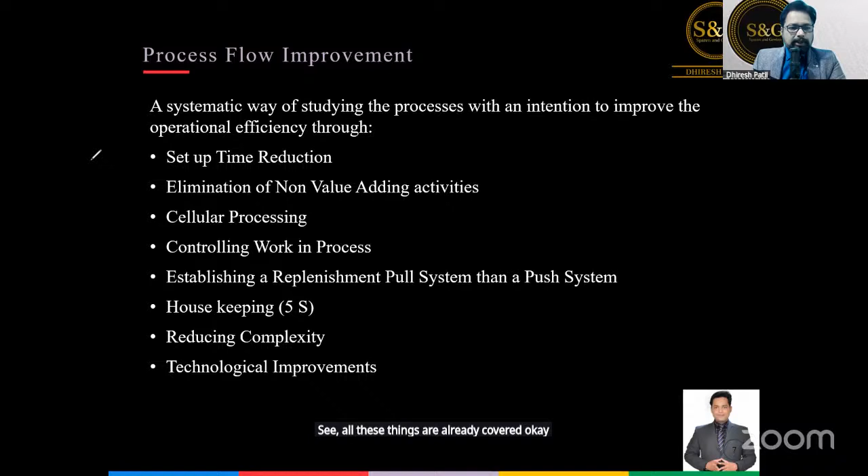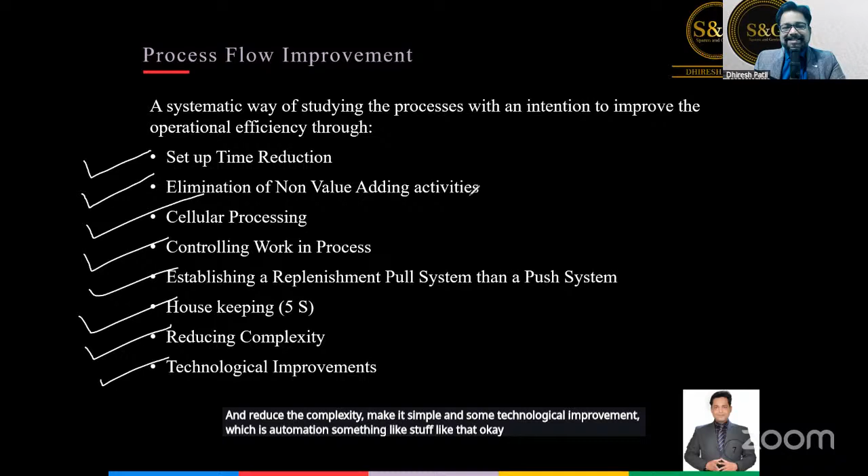So setup time reduction is called the SMED technique, elimination of non-value added, cellular processing, controlling the WIP. So this is the Little's law, which we are going to discuss. Pull system, push system, the housekeeping, which is 5S, and reduce the complexity, make it simple, and some technological improvement, which is automation, stuff like that. So these are certain tools we use from the lean point of view. So let's cover some of them right now.

So the first one let's cover is setup time reduction. Now, what is setup time? First of all, let's try to understand. Setup time originated from Toyota. The biggest challenge to all the automotive sector is changing the dies. Let me just give you a simple analogy for the non-technical people. Let's say this is your car. Imagine this is your car.

So now let's say this is the car, and we have the front door and the back door. I've just drawn a very old-fashioned car so that you can correlate with this. So we have this portion made up with a different shape, this portion with a different shape, and so on. Bonnet and the top of this. So all these different body parts of the automobile basically use a die. What is that? The equipment is a die.

What is a die? It's very simple. Let's say this is the plate. And I want to make this kind of a shape, the top of the roof shape. So a die will be there like this. I'm just giving a very basic idea. And this is a simple metal plate, which you want to convert. Now, what will happen is there would be a mold, exactly. Mold or the die, exactly.

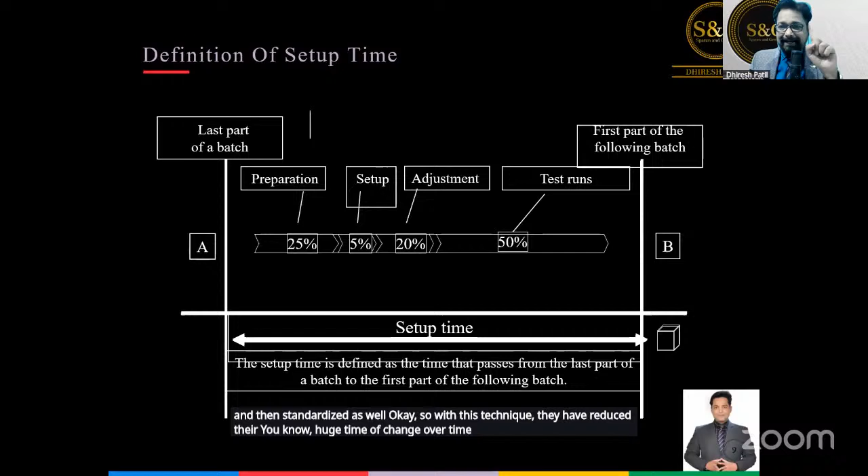So with this technique, they have reduced their huge changeover time into a single digit minute. That's why it's called Single Minute Exchange of Die, SMED. Super. Chalo. So this is all explained in your curriculum. You can go there and check that out.

Now then, elimination of non-value added, NVA. See, there are basically three types of activities. One is called value added. Second is called business value added. Third is called non-value added. Value added meaning, for example, for the bank account opening process, account opening is a value added process. Clear?

Now business value added is a maker checker concept. For example, a check has to be processed. The first accountant will make the check, process the check. There will be a senior person who will validate whether all the details are filled properly or not. So it's called the maker checker concept. This is not important for the customer, but it is important from the business point of view. That's why it's called business value added.

And non-value added, we all know TIMWOOD, right? Transportation, inventory, motion, all the 7 types of waste are called non-value added. The downtime, correct? So all these are non-value added aspects. So in your company, give me an example. Or let me ask you one question.

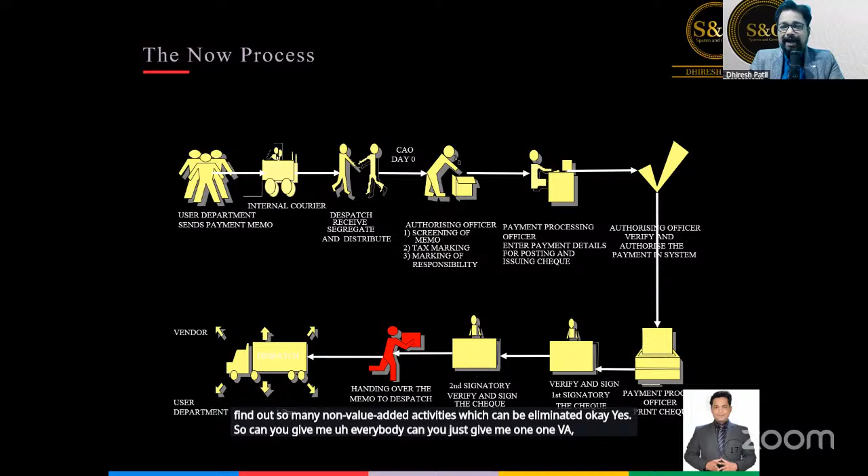Okay. Yes. So can you, everybody, just give me one VA, BVA and NVA activity in your company? Chalo, give one example, type in the chat box so that we can understand. I will read out so that we can learn from each other. One VA activity, value added activity you're doing. Just write it very short.

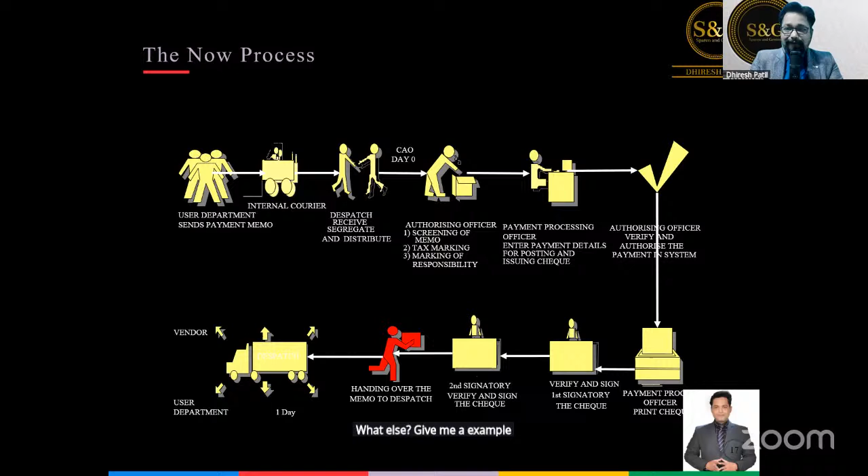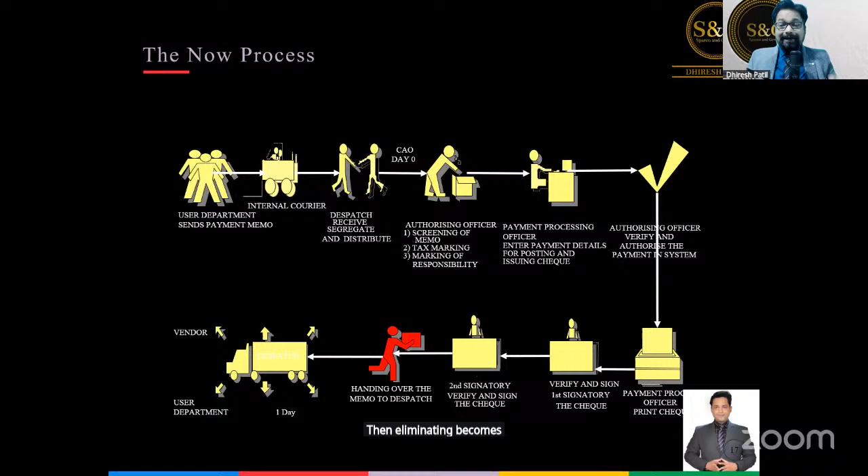Okay, so that you will get that lens, and you can identify the activities which are falling in these three categories. Once this lens is developed, then eliminating becomes very easy, but identification is very difficult. Understand this. Eliminating non-value added is easier than identifying non-value added. And this is a very important stuff.

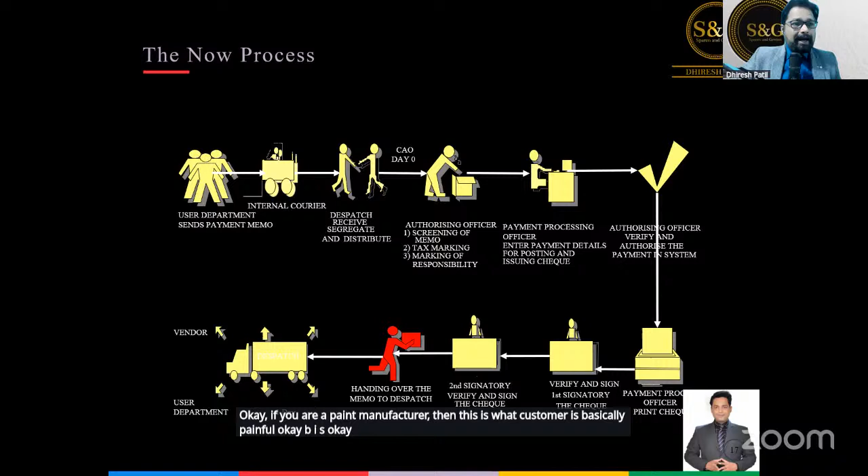Okay. Providing good quality finishing paint is value added. Fantastic. That's what the customer is paying for, right? A good quality finishing paint. If you are a paint manufacturer, then this is what the customer is paying for. Okay. BIS. Value added is BIS. Introduction to LIMS is value added. Okay. So according to your industry, those will be value added.

Internal audits are business value added. Yes. Very good. Value added is machining. Business value added is loading, unloading job. Very good. Non-value added is transportation from one machine to another. Very nice. Super.

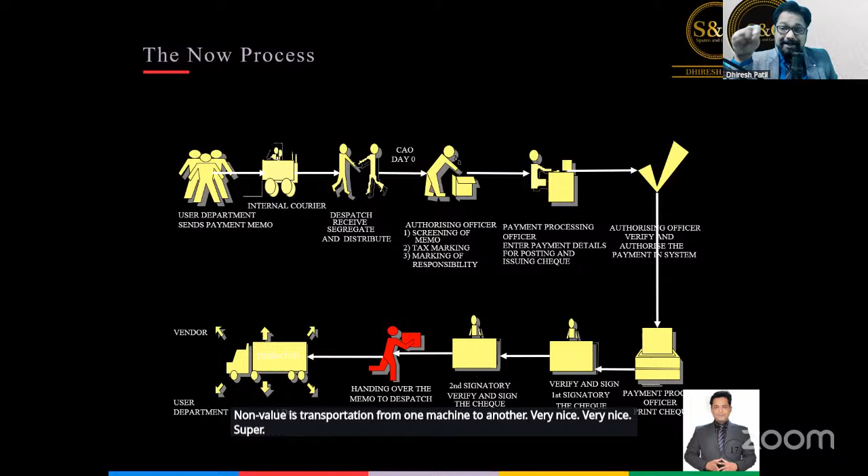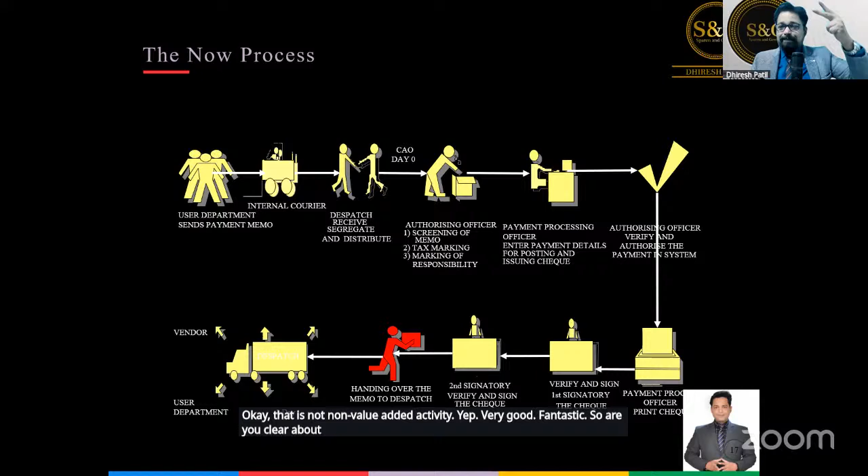Now, if you go deeper, if the distance between the two machines is excessively high, this is unnecessary transportation time, and that is a non-value added activity. Clear? Very good, fantastic. So, are you clear about VA, NVA, BVA? Just give me yes in the chat box. Do this exercise, you can eliminate a lot of unwanted stuff. Okay, just give me yes.

Super. All right. Now let's talk about a very important concept about inventory. There is a law called Little's law. Professor Little was a professor from MIT, Massachusetts Institute of Technology, US. So according to him, the overall lead time... see, whenever we talk about lean tools, we talk about the time element: changeover time, cycle time, lead time. The time element comes into picture, the inventory element comes into picture.

So, according to him, the lead time is directly proportionate to WIP and inversely proportionate to average completion rate. I'll give you a very simple analogy example so you can understand this concept. Little's law. Now, imagine you are going to an ATM to withdraw some cash. This is the ATM, automated teller machine. There are already 5 people standing in the queue.

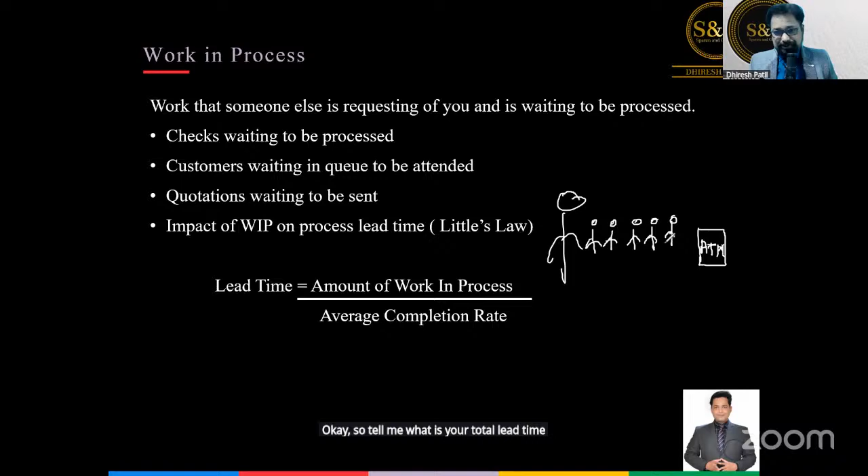And you are the 6th person. I've just drawn you a little bigger. Now, the ATM machine takes 5 minutes to dispense the cash for every person. So tell me, what is your current total lead time of this entire process? Think about it. There are 5 people in the queue right now, and everybody takes 5 minutes.

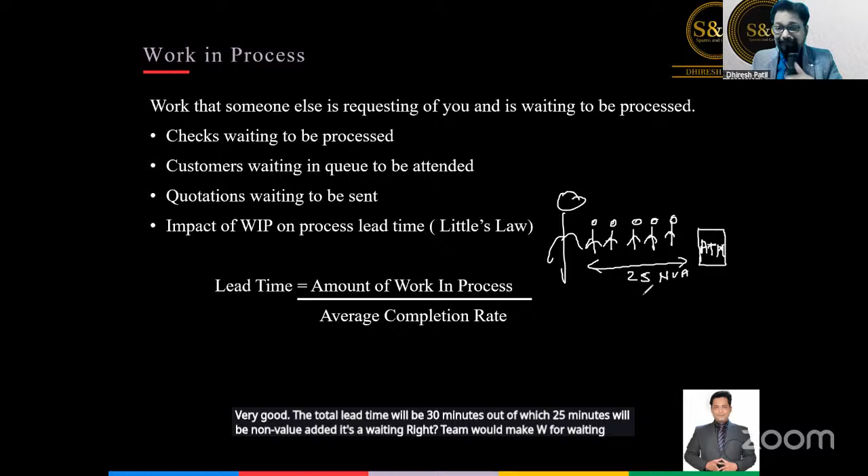Very good. The total lead time will be 30 minutes, out of which 25 minutes will be non-value added. It's waiting, right? W for waiting. So you wait for 25 minutes and 5 minutes will be value added for you. Yes or no? Everybody with me? Just type yes in the chat box. So imagine this is your WIP, work in progress. 25 minutes of waiting time, non-value added, adds no value to you.

Correct? Now let's work on the first point, which is amount of WIP. Let's reduce the WIP. According to Little's law, the lead time in this case is 30 minutes. Now, instead of 5 people in the queue, there are only 2 people. So let me reduce the WIP from 5 to 2. Now tell me what will be the lead time for you. Type in the chat box.

Exactly. It will be 15 minutes, because 10 minutes non-value added, which is waiting, and 5 minutes for your own processing. So just by reducing WIP, we have reduced the lead time from 30 minutes to 15 minutes. Are you clear? Up to here, everybody with me? Just type yes in the chat box.

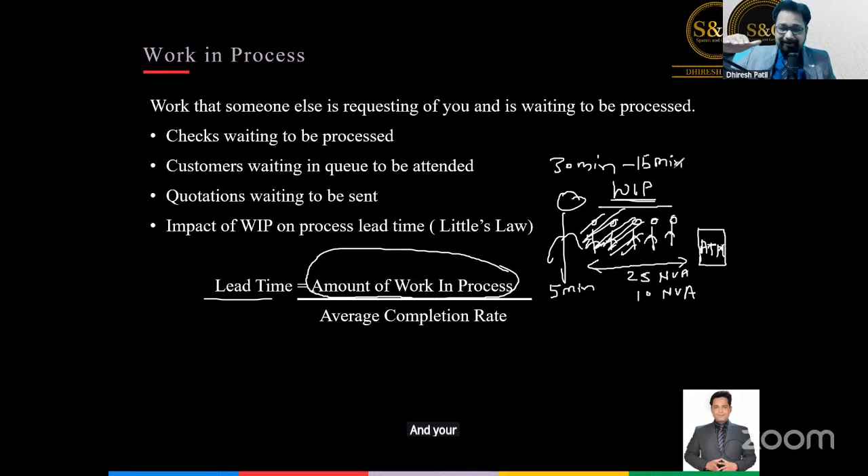Everybody understood? So WIP earlier was 5. Now we have reduced to 2 so that we are reducing it faster. Correct? So it's like this. If you are going for, let's say, loan processing in a bank, and that person already has 10 files, and your file is the 11th one, you have to wait for those 10 files for your file's turn to come. So that is a waiting time.

Now imagine instead of 10 files, he has only 2 or 3 files. So according to WIP, your waiting time will reduce and your lead time will reduce. Now coming back to the denominator part, which is average completion rate. Instead of 5 minutes dispensing, if we increase the speed of the machine, what will happen then? Let's say instead of 5 minutes, the machine starts dispensing in 2 minutes. That's what the completion rate is.

Now in this case, what will happen to the lead time? If you have 2 people in the queue and you require only 2 minutes to dispense the cash, how much will be the lead time? Type in the chat box. Exactly. So now you require only 6 minutes to dispense the cash, out of which 4 minutes will be waiting time, which is non-value added, and 2 minutes for the dispensing.

So from 30 minutes to 6 minutes, we worked only on 2 elements. One is the WIP, and the other is the completion rate. We have made the completion rate faster so that the lead time can be reduced from 30 minutes to 6 minutes. Are you clear? So you also can think about how I can reduce my WIP and how I can work on a faster completion rate. Clear, everybody? This is called Little's Law. Just type yes in the chat box if you have understood this basic fundamental principle.

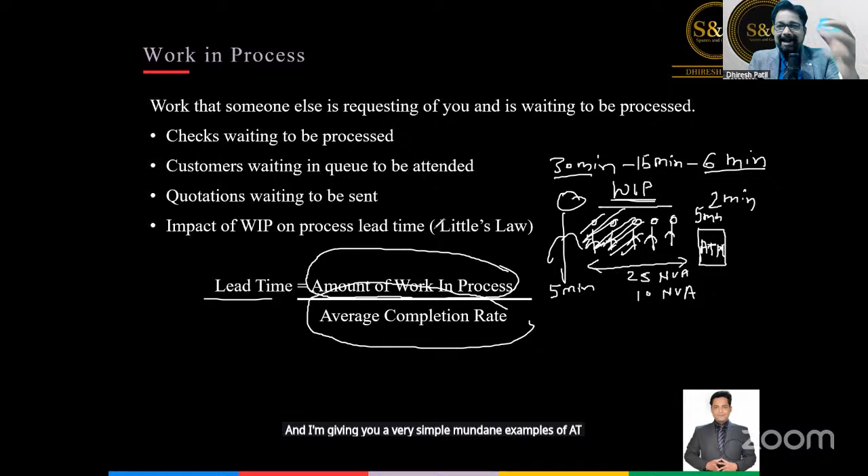Very powerful laws, guys. These are very simple. See, SMED, VA, NVA, TIMWOOD, these are very, very simple, but equally powerful laws. And I'm giving you very simple mundane examples of ATM machines and the juicer, mixer, etc., so that you can correlate with this very easily. All right. Super. Thank you very much.

Now, how many of you are aware of 5S? 5S kisko pata hai? So all this is explained in a sequencing manner. Yeah, workflow layout. Before 5S, there is a small topic of workflow layout also included in your curriculum. I'll come to 5S. Just let me touch upon this topic as well quickly. Workflow layout also plays a very important role, whether it is a bank, a BPO, or a manufacturing company. How the work is flowing on the shop floor, on the Gemba basically, where the action is happening, which makes a lot of sense.

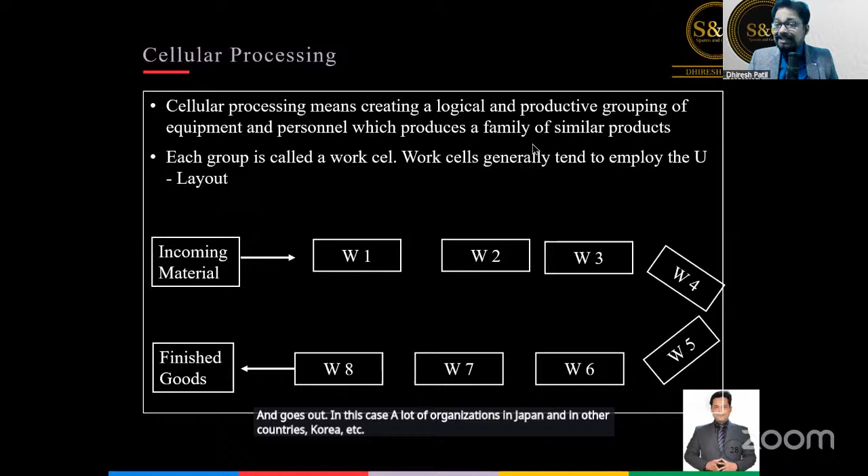One way of doing this is cellular processing, or a U-shaped layout, where the process starts here and goes in a U shape and comes out. A lot of organizations in Japan and other countries like Korea have used this cellular layout successfully, where only one or two people can manage multiple operations because of this setup. It's designed so that waiting time is minimum, and motion waste and transportation waste are minimum. This is called cellular processing.

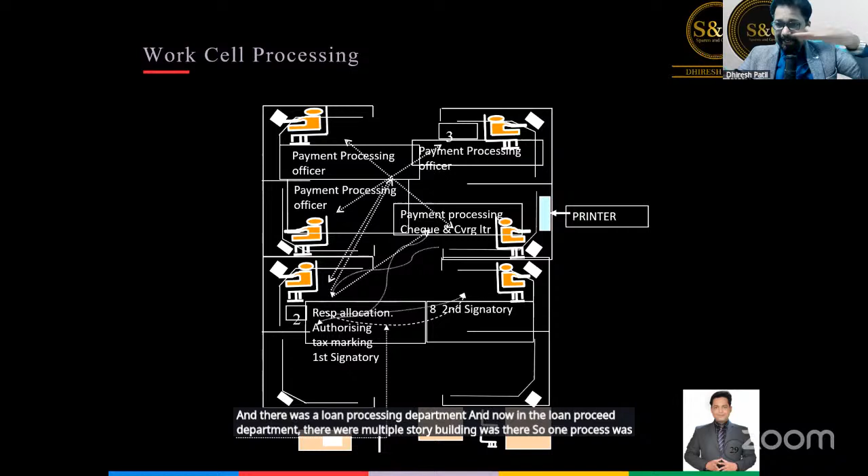One bank example I'd like to give for this work cell processing: this is a live example, we were consulting that bank, and it had backend processes, including a loan processing department. In that department, there was a multi-story building, so one process was happening on the second floor, another on the third floor, and another on the seventh floor.

So what we did was ask all those process team members to sit in one physical location. Now, I'm talking about 10 years ago, and technology has improved a lot since then, but see the fundamental point, guys.

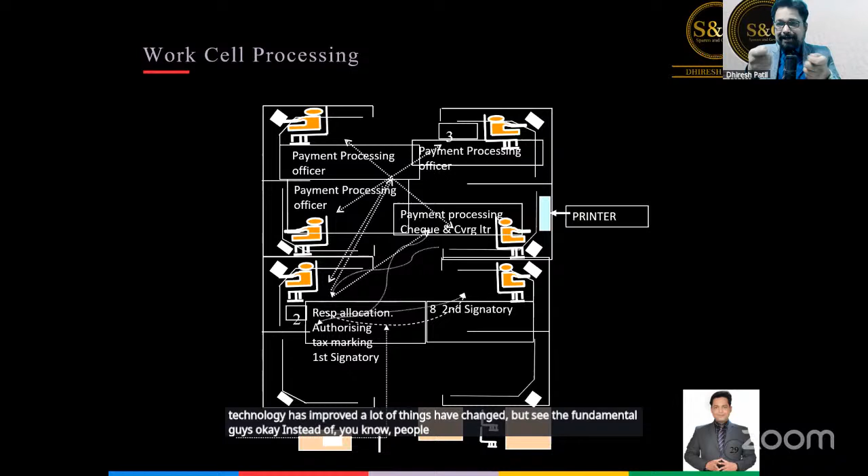Instead of people carrying physical application forms to multiple floors and waiting at each location, now all three people sit together using this cellular layout and process the loan faster. Earlier they used to take 7 days to respond to the client, and now they're doing it within 24 hours. Whether your loan will be passed or your file will be rejected, or what deviation is in the file, that can be displayed within 24 hours. This is a huge achievement with this simple but very powerful technique of cellular processing design.

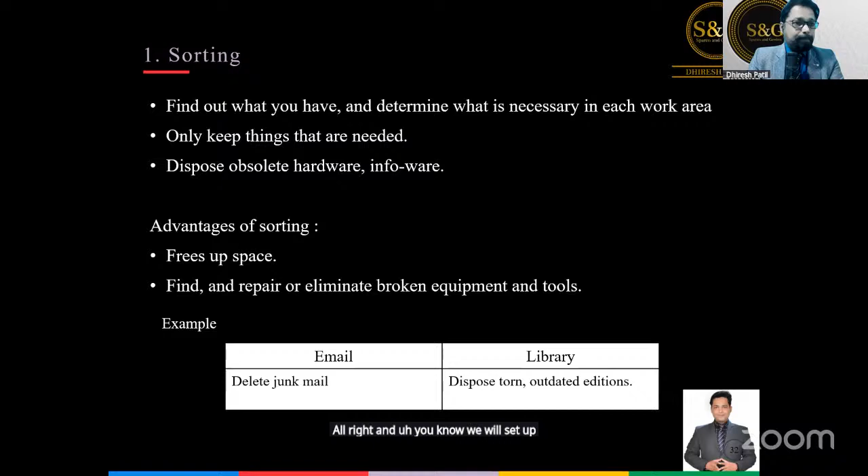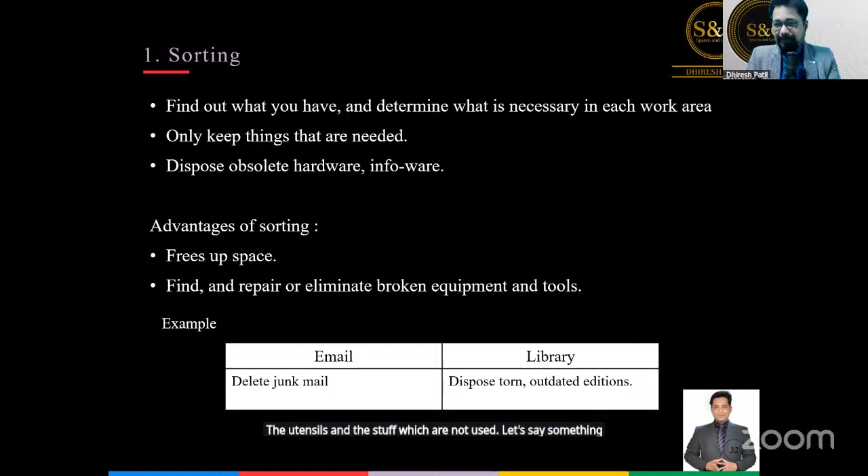So the first is sorting. Everybody knows this - sorting is what is required, what is not required. I always say our home kitchen is a fantastic example of natural 5S. Housewives or people working in the kitchen aren't aware this is a technique called 5S, but we are naturally doing this. Whatever is wanted is kept very close to the gas or where the work is happening. Utensils used rarely, like once a week, are kept a little aside. Bigger utensils used for festivals or occasions are kept farther from the gas. So we are actually doing 5S unknowingly. Sorting is nothing but sorting wanted and unwanted separately.

Yes, you'll get the recorded version of each and every class which is happening live. You will find that in the master class archive. Now, place for everything and everything in place means whatever is required, you will put it in the right slot, right order, so that retrieval can become easier.

How many of you are internal auditors here? Just type me in the chat box. Kitne log hain internal auditor yahan pe? How many of you are internal auditors? Okay, a lot of people are there.

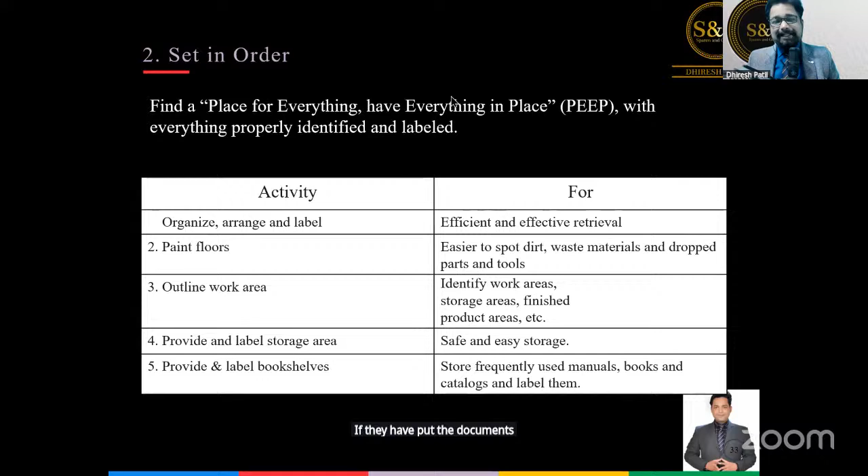As an internal auditor, let's say if you ask for a document or record while doing the audit, and they take more time to retrieve that record from the system, that means setting in order is not properly done. If they have put the documents and records in a proper place, retrieval is a quick indicator. The retrieval time, how much time they take to retrieve, will basically define how properly set in order is done.

Then the shine. A lot of people consider shine as just a mere housekeeping activity, but it doesn't mean only housekeeping - it means cleanliness. I always give the example of cleaning our own automobile or car - we are not only cleaning the car, we are also inspecting it, checking whether there are scratches and scars, whether the wiper blades are proper or need changing. We also check oil levels, water levels, and tire pressures.

If you're doing this in the factory, you are inspecting the machine. While cleaning, you are checking whether there is any oil leakage, whether any part of the machine is hotter than other parts, or there's noise or air leakage. So all these things you can identify when you are cleaning that equipment. You're not only cleaning, you are actually doing maintenance as well.

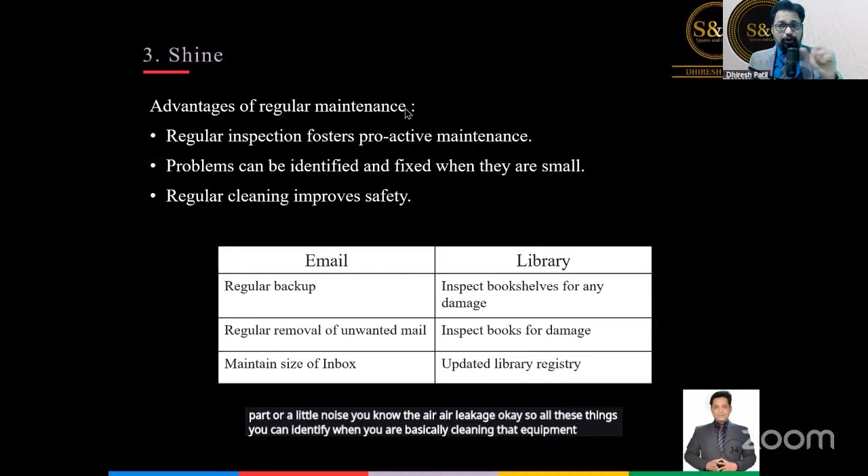It's proactive maintenance. Then comes standardization, making it habitual, making it a procedure and a practice, which is very, very important. So establish the procedure, who will do what, roles and responsibilities, and make it completely standardized.

And then the last one is called sustain. Sustain involves training to maintain, and auditing whether people are following this properly or not. So there is something called a layered audit system.

What is a layered audit system? Let's say imagine there's a machine. What is expected? The person who is operating the machine will audit the machine every day. This is called layered audit.

Second, the supervisor of that machine will inspect or audit the machine for 5S every week, once a week. Then the manager of the department will do it once a month. Then the head of the department will do it once a quarter, like that. So there are levels, and according to the levels you can define what is the auditing frequency. This is called a layered audit system.

This makes sure that the entire system functions in the right direction. Any course correction required, any training required, that can be taken care of. So this is called a 5S mechanism, and this is the stuff - before 5S and after 5S, a huge change can be seen. It reduces a lot of hidden wastages, and a lot of improvement opportunities can be found out.

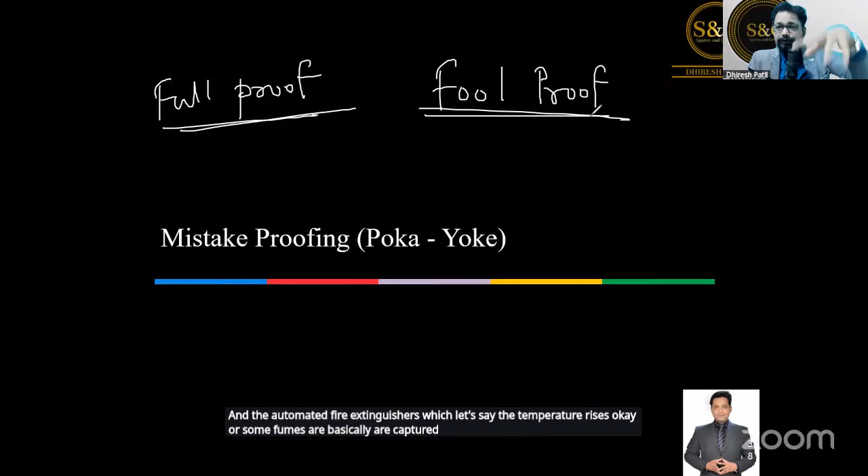Very good. Fire extinguisher in the office. So, the automated fire extinguishers: let's say the temperature rises or some fumes are captured, then the fire extinguisher starts automatically, right? Fantastic. So these are the techniques of Poka-yoke. Nowadays, if you go very close to a rotating equipment, there are some sensors. If a human being comes very close, that equipment will stop.

Start button with two hands in the press machine. Fantastic. That's a very good Poka-yoke. That means in the press machine, both hands have to start the machine, then only that machine will start. Otherwise, let's say one hand is in the machine and the other hand starts the machine, then it can hit your hand and injury can happen. So to avoid that, the two-hand start system is a very good Poka-yoke.

Motor RPM Poka-yoke, laptop keyboard Poka-yoke, reverse parking sensor of the car, safety curtains in the press machine. Fantastic. So there are so many Poka-yokes we have seen around us. Super guys. So these are some of the lean tools which are covered in your green belt curriculum. As we go into the black belt curriculum, there are other tools available as well.

Apart from that, there is something called SCAMPER also. Everybody knows SCAMPER? Just type yes in the chat box.

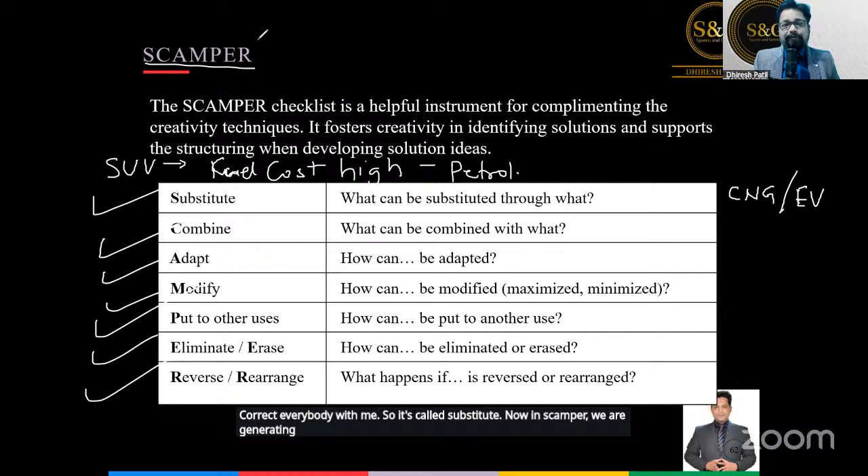So it's called substitute. In SCAMPER, we are generating ideas. Actually, it is coming from design thinking, a very powerful methodology. So SCAMPER is used from design thinking, right? Very good. So substitute. Then combine.

What can I combine to reduce my fuel cost? For example, I can do carpooling, where instead of traveling alone, I can combine the travel of 2 or 3 people. That is called combine. Are you understanding? Yes? Adapt. What can I adapt?

No, SCAMPER is a solution generation tool because we are in the improve phase. We are generating ideas. So it is not a root cause analysis tool. Root causes are already identified and validated in the analyze phase itself. Now we are generating ideas on the validated root causes.

So adapt means, how can I adapt? Can I adapt public transport like the metro, in Delhi or other cities like Bangalore? Now Mumbai will also join this. A lot of people are not using their private vehicles and are traveling by metro because that is more convenient. Then modify. What can be modified? Can any habit be modified here? So SCAMPER generates the ideas, and the idea is to let all the ideas flow.

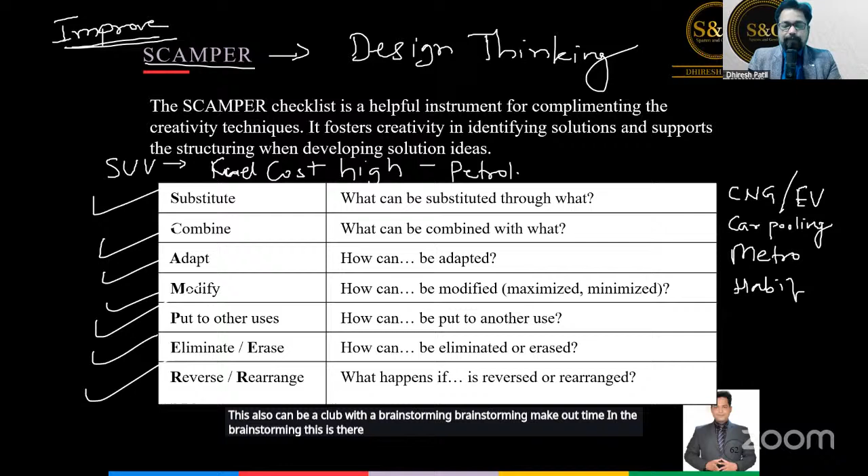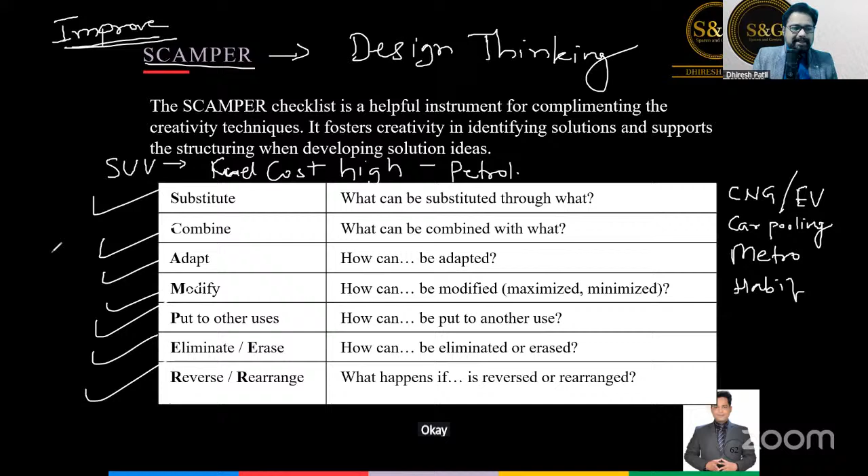Brainstorming mein kya hota hai? In brainstorming, there are two types. One is called structured brainstorming, the other is called unstructured brainstorming. Structured meaning, let's say everybody, all the team members, are sitting together in a circular fashion. We will go round robin, round table like this, one by one, and everybody has to give ideas and solutions. This is called the structured way of doing this.

Unstructured meaning when the brainstorming starts, whoever gets the idea first will raise their hand and give their ideas, or they will write it on a sticky note and paste it on the board. So Scamper is a guided brainstorming method where we give trigger words to people so that they can think in one direction: what can be substituted? What can be combined so that this problem can be solved? This is called Scamper analysis. A very powerful tool to generate ideas and solutions.

Clear, everybody? Just type yes in the chat box. Scamper is a very powerful tool which can generate a lot of ideas in a very short span of time. Use it in your yellow belt project, green belt project, even in your daily routine brainstorming and idea generation. Very, very powerful tool.

See, the biggest advantage of Lean Six Sigma tools is that all these tools can be used individually as well. You can use Pareto individually, cause and effect, root cause analysis, Scamper, hypothesis testing, regression. This is the best part of these Lean Six Sigma tools.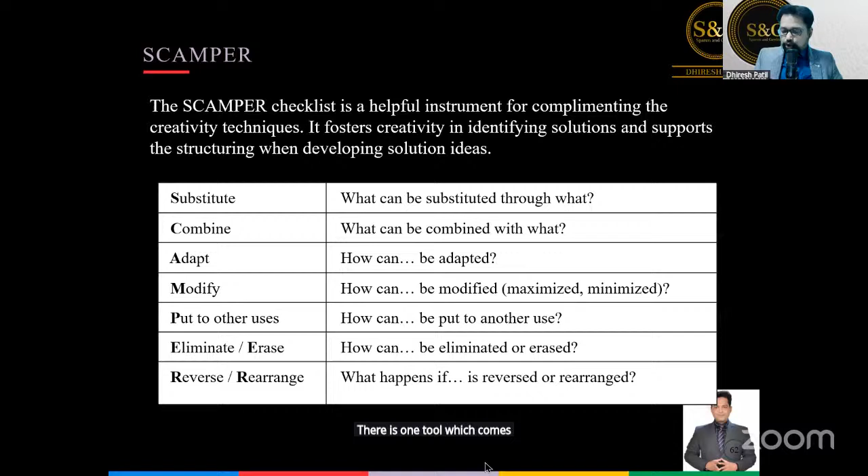Super, very good. So once you generate a lot of ideas, there is a tool to shortlist those ideas, called the EB matrix. Everybody make a note: EB matrix meaning effort benefit matrix. We have generated a lot of ideas and solutions through those tools, but every idea cannot be implemented, right? So we need a technique to shortlist them, and the EB matrix helps us in shortlisting and prioritizing those ideas.

Effort can be in terms of time, resources, money, approval from top management, or some external party involvement in implementation. For example, let's say you want to give an awareness training program to your own team members. Is it low effort or high effort? L for low and H for high. Type in the chat box, everybody.

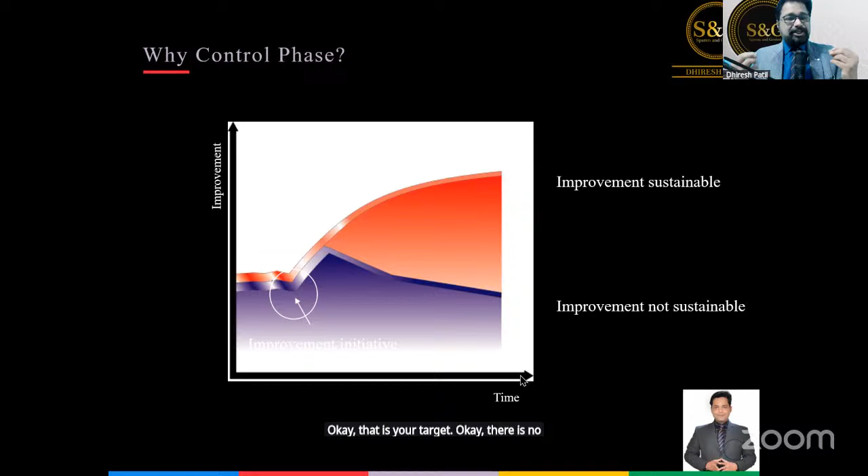Okay, theek hai. Just consider 60 days as your target. All right. Ek second.

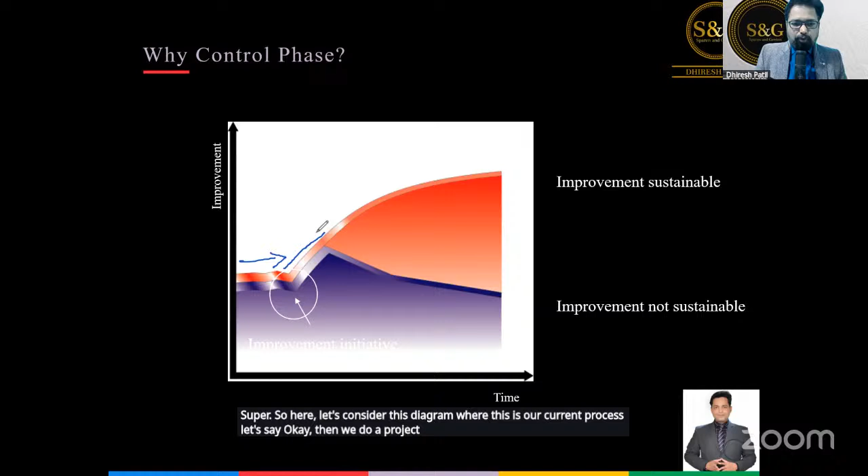Super. So here, let's consider this diagram where this is our current process, let's say. Then we do a project and at this point in time, we see some improvement. Now if the control phase is not properly implemented, then this entire effort can go in vain. So you have to decide whether you want to go upwards or you want to go down again to square one. So control phase is a very, very important phase.

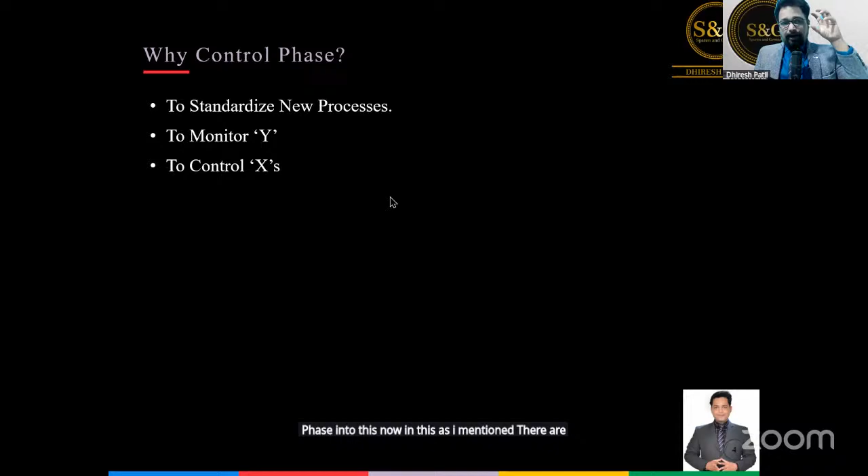Now, in this, as I mentioned, there are 3 major levers, basically 3 major objectives we achieve. One is standardizing the new processes. Secondly, we monitor the Y and we control the X's. Standardizing the new processes, monitoring the Y and controlling the X's.

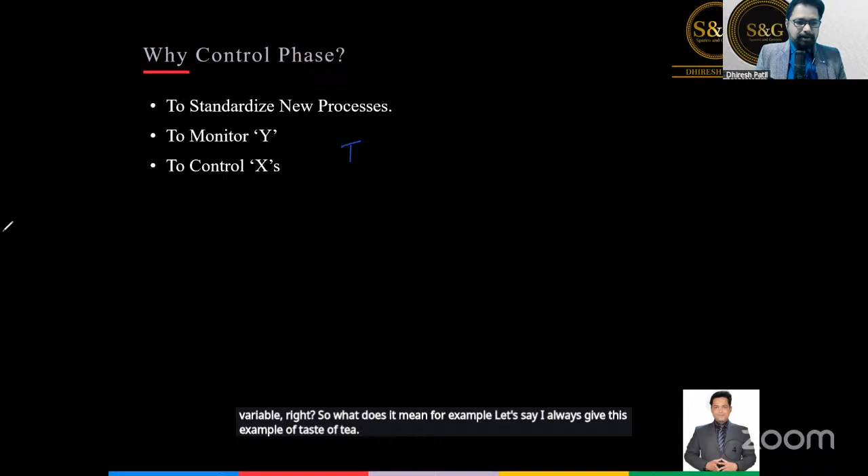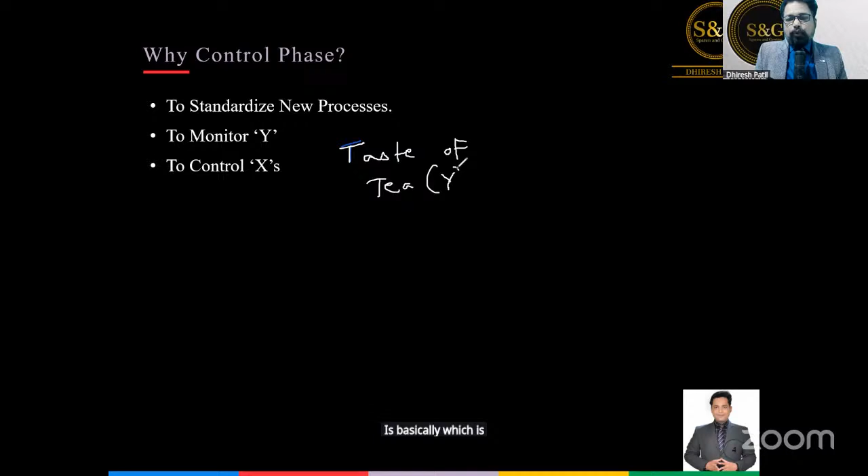Okay, chalo. So monitoring Y and controlling X is very, very important. Standardizing new processes, monitoring Y and controlling X. So we monitor the output variable and we control the input variable. What does it mean? For example, I always give this example of taste of tea. Let me just write on the whiteboard. Taste of tea is a Y, which is a function of lots of X1, X2, X3, X4, etc. So taste of tea we have to monitor, which is monitor the Y and control X.

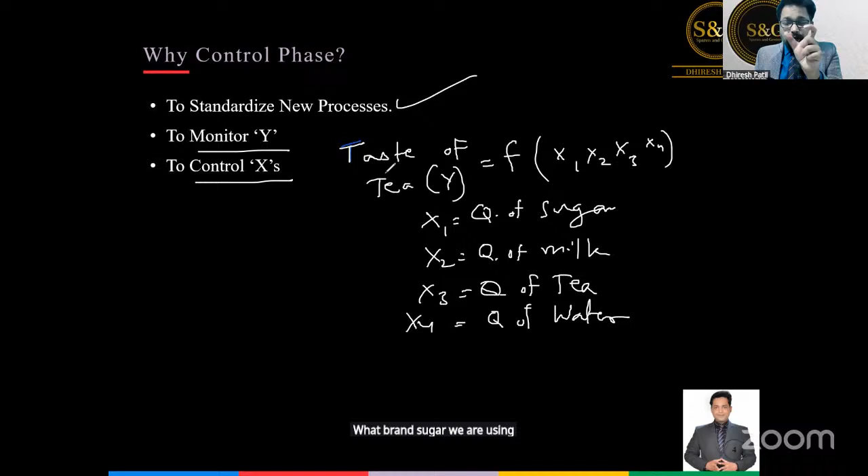Now, X1 is, let's say, quantity of sugar. X2 can be quantity of milk. X3 could be quantity of tea powder. X4 could be quantity of water. Now, what you need to do is standardize everything: what brand of sugar we are using and what should be the quantity of sugar has to be frozen. So this is called standardization.

And then we need to monitor them, and for any deviation, we need to immediately take action. So this is the main objective of control phase: constantly monitor the taste. There are various tools we are going to learn. Control chart is one of the tools, and we are going to go deeper into control charts now. So you monitor the taste and you control all these X1, X2, X3, X4. Clear? And how do we do that?

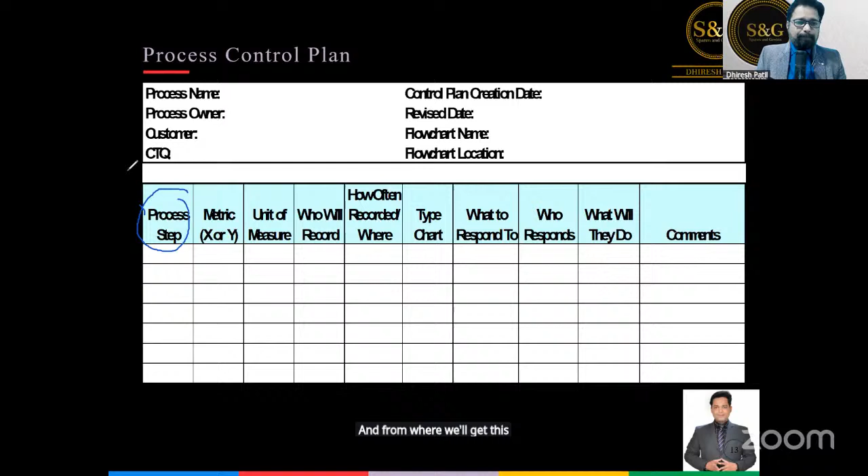There is a control plan. Let me show you a control plan, the process control plan, which looks like this. Let me just give you a quick update about it. In the control plan, we first list down all the process steps. And from where will we get this? We will get all the process steps from SIPOC. You remember SIPOC, right? Day one, we did the SIPOC analysis. So we list down all the process steps.

After that, the next column is metrics. Which metric? Is it the Y metric? If you want to monitor the taste, it will be the Y, which is the output. If you are monitoring the sugar, it will be X1. If you are monitoring the milk, it will be X2, etc. Then unit of measurement. For the taste, your unit of measurement will be rating.

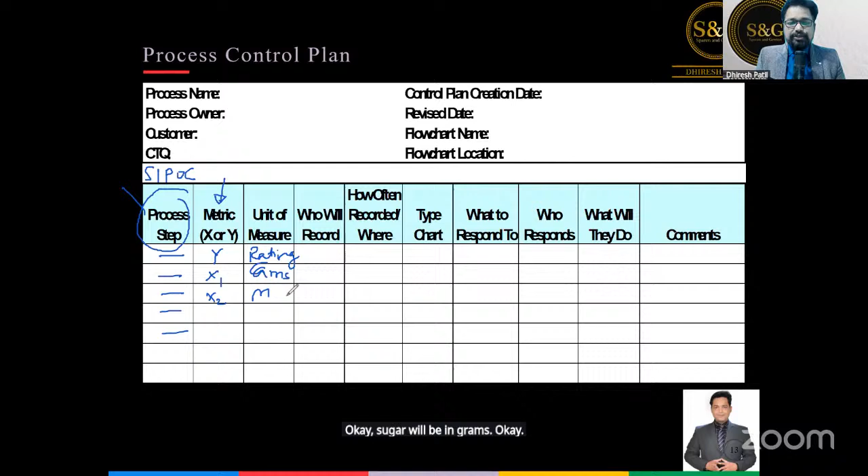Okay. Sugar will be in grams. The milk will be in milliliters, etc. So what is the unit of measurement for each and every factor that you have to write down? Who will record? So who is the responsible person for recording?

Let's say rating. Let's say Vijay will be responsible. Ajay will be responsible for this. Sanjay will be responsible for this. So you have to define who is responsible to record all these things.

How often will they have to record? What is the frequency of recording? So maybe this is daily. Maybe this is every shift, per shift. So this is how you have to define the frequency.

And then the type of control chart. Now, what does it mean? This is the type of control chart basically. So I'm going to cover what are the different types of control chart we have. So in this, I will cover that.

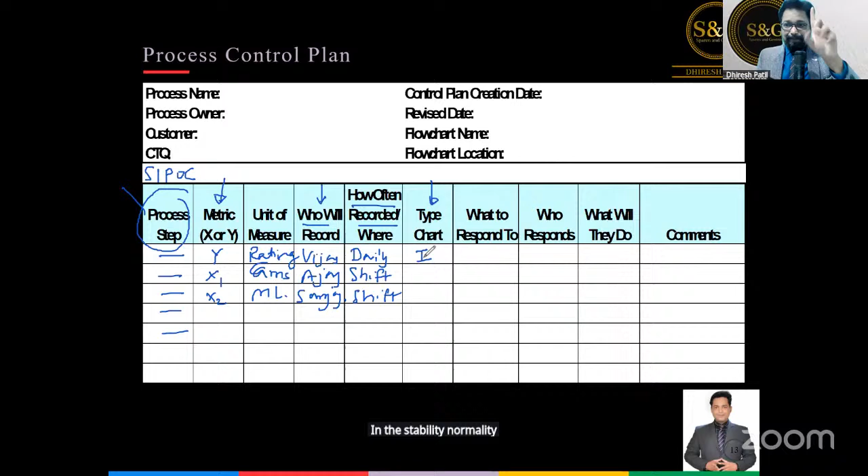For example, if you remember, in the stability, normality and capability in the measure phase, we studied the I chart, which is called the individual control chart. Do you remember that? Just give me yes in the chat box. Remember the chart which was looking like this, correct? We studied that. This was the I chart.

Similar to the I chart, there are other control charts as well. There is X bar R chart, X bar S chart, P chart, U chart, C chart. All these charts are there, which I will cover now.

Now, you have to write down what to respond. That means, let's say, for example, the rating, the taste of the tea, if it goes below 8 out of 10, we have to respond immediately. So you have to write down here what to respond, meaning if the taste goes below 8 out of 10, this is the point to respond. Are you understanding? So here we have to define what is the point of response.

Then who will respond? The manager will respond. If the taste goes down, the project manager will respond immediately. What will they do? They will, let's say, call for a meeting to assess the situation, to collect the data, to take the proper action plan. And then the outcome of that meeting can be written in the comments.

Are you understanding? So this is called a process control plan. Once you improve the process, you have to standardize that process. You have to monitor that process and you have to control that process through this process control plan. Are you clear with this? And this will follow all these X's and the Y's. Just type yes in the chat box if you are clear. For each and every line item, you have to complete this activity and you have to rigorously follow this.

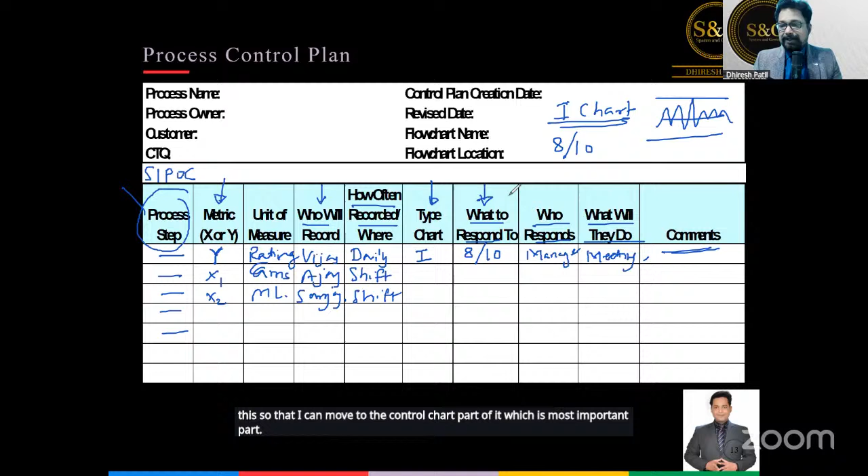Just give me yes if you are clear with this so that I can move to the control chart part of it, which is the most important part in the control phase.

Clear? Very good. Very good. Super, super guys. Amazing. You guys are awesome as always.

So let me go to a whiteboard first to quickly cover the types of control chart. Super. Now, yesterday we discussed the I chart. Now, when we have continuous data, just draw this graph along with me. When we have continuous data, you have the I chart, you have the X bar R chart, and you have the X bar S chart. What is that? I will explain to you.

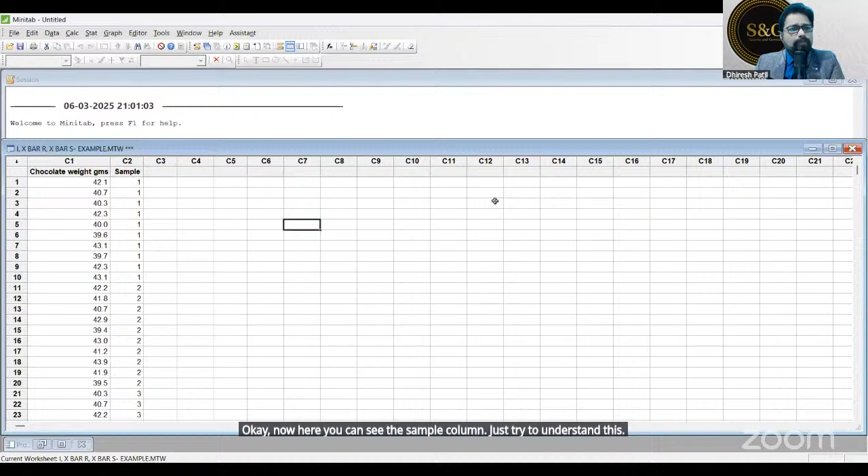Don't have the chart in Minitab. Which chart in Minitab? Okay, let me just share this file once again.

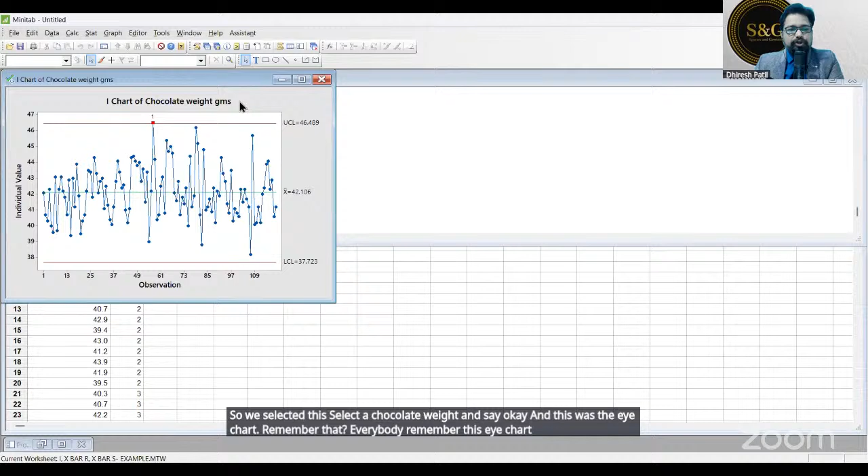Stat, control chart, individual variable chart for individual. We did this yesterday. Correct? So we selected this, selected chocolate weight and said okay. And this was the I chart. Remember that? Everybody remember this I chart? Individual chart. It's a basic control chart. I hope everybody remembers.

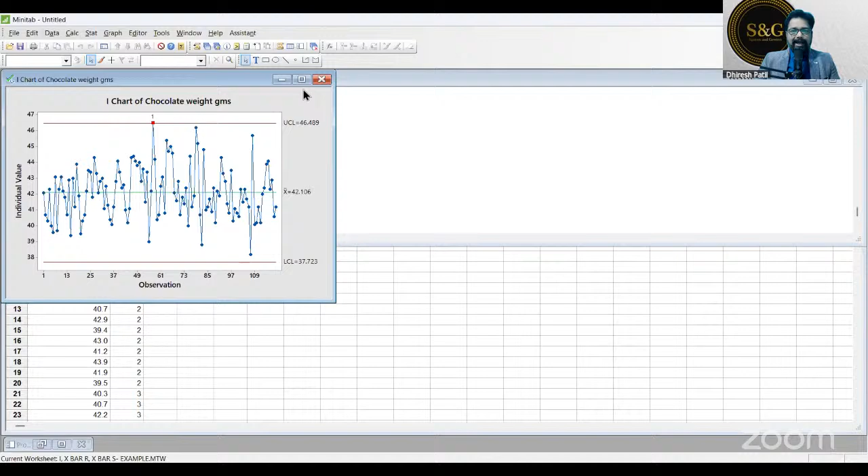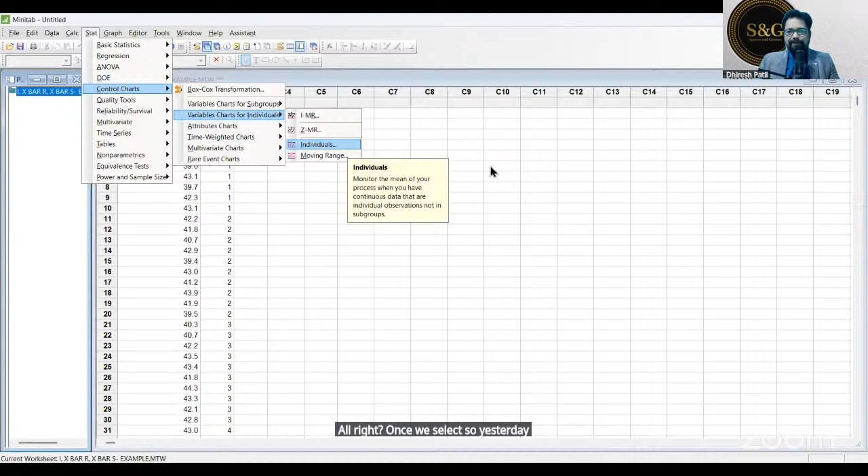Yeah, what is the process for the I chart? This means go to the data, go to stat, control chart, variable chart for individual, individual. This is the process. Stat, control chart, variable charts for individual, individual. Once we select - yesterday we saw this, so I'm going fast. Select this, put in chocolate weight, say okay, and you will find this control chart called the I chart.

Okay, now let's check out this sample. So here they took 10 samples at one time. Understand this? Okay, so in the first sample they have taken 10 chocolates.

This is called a subgroup. A group of samples they have taken. The group of chocolates they have taken. Okay, in the second sample also they have taken 10 chocolates. Third sample also they have taken 10 chocolates, etc. So they have taken 120 total chocolates, 12 samples and every sample has got 10 chocolates. Okay, now let's go for the second chart, which is X bar R chart.

In this chart, what we do here is, first is X bar. What is X bar? It is the mean. So they will take the first sample, let's say for example this one. So this is the first sample, and they will check the average of this, and let's call it X bar, X1 bar. Okay, then they will take the second sample. Focus here, guys, focus here.

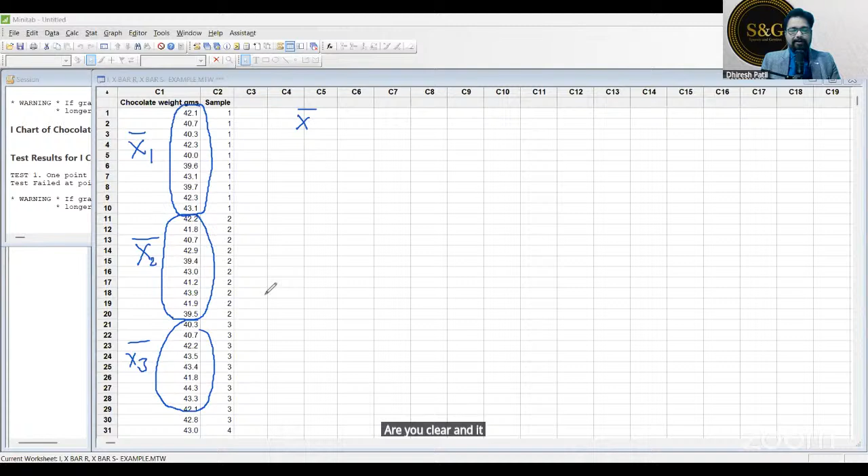Then they will take the second sample. The software will calculate its average. This will be X2 bar. Okay, then it will take the third sample. Are you clear? And it will take X3 bar. Right? And the second one is called R - R meaning the range. X bar is the mean and R is nothing but a range.

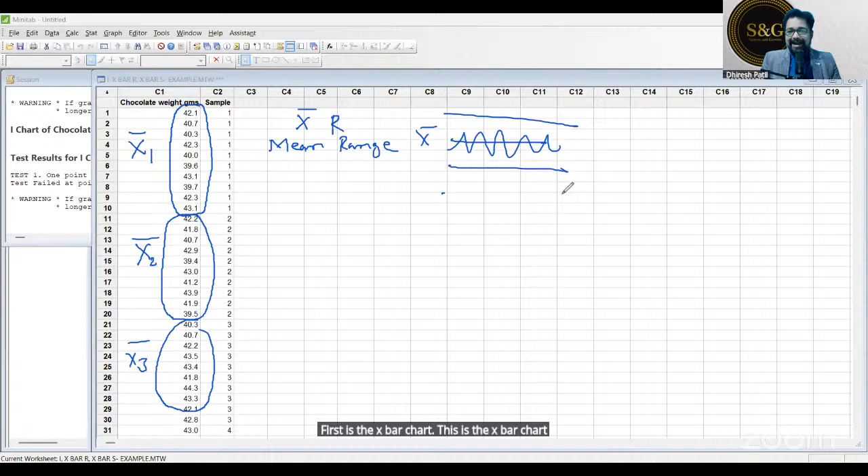So we are actually plotting two charts here. First is the X bar chart - this is the X bar chart. And later we are plotting something called a range chart. What is a range chart? Now out of this, what is range? Maximum minus minimum. Remember this? In the basic statistics we covered that - what is the range? Maximum value minus the minimum value.

Okay, so what they will cover is, let's say this is the first 10 chocolates. What is the maximum value over here? Let's say 43.1, right? So this is the maximum value. Let's say, for example, this is the maximum value. What is the minimum value? I think this is 39.6. Correct? This is the minimum value.

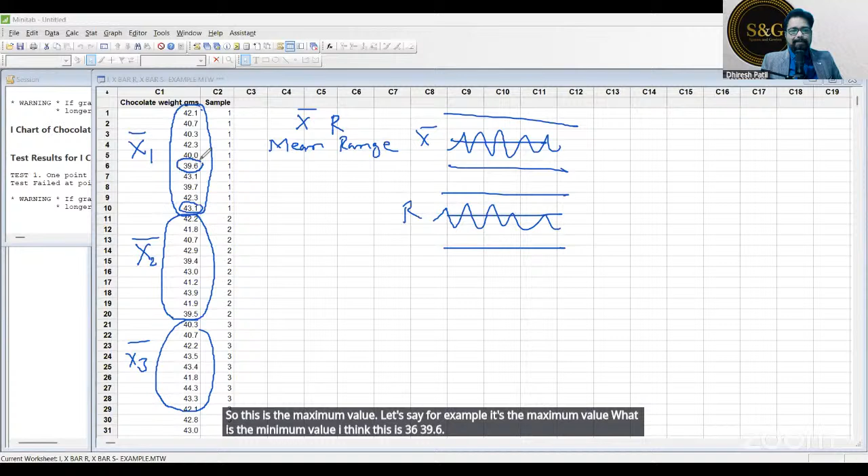So 43.1 minus 39.6 becomes, how much is it? It is, I think, 3.5, is it? Yeah, so it is 3.5. So 3.5 grams will be our range 1 - maximum value minus the minimum value. Okay, then the range 2, the second group's range, maximum minus minimum. Then the third group's range, maximum minus minimum, and so on and so forth.

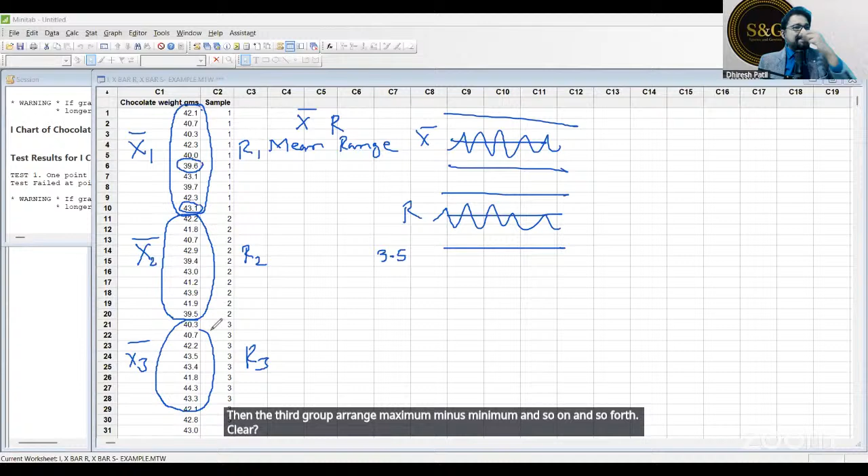Clear? Are you clear with this? Just type yes in the chat box. Is the concept clear? So it will calculate the X bar, the average, and it will calculate the range of each and every sample separately, and it will be plotted. Okay, let's plot this. Let's go to stat, control charts, variable chart for subgroup. Look at this - variable chart for subgroup, X bar R. X bar R. Everybody follow this?

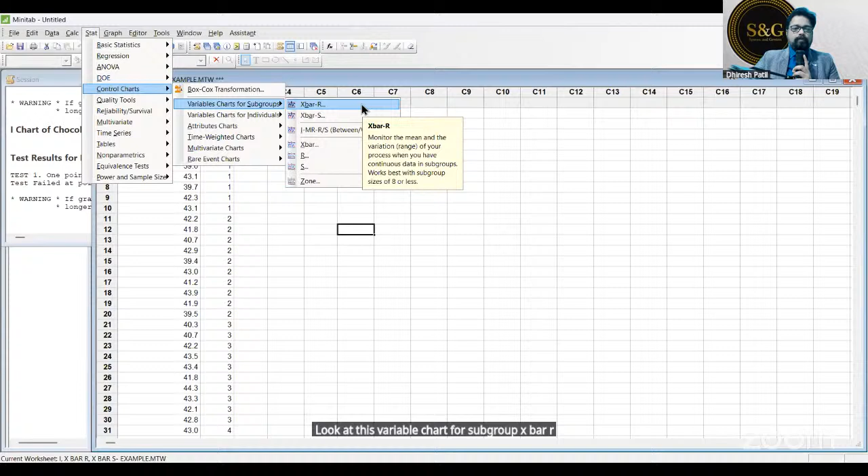Go to Stat, Control Chart. All the control charts you will find in the Control Chart column itself. Variable chart for subgroup - subgroup meaning the group of samples you are taking. Then X bar R, just click on that.

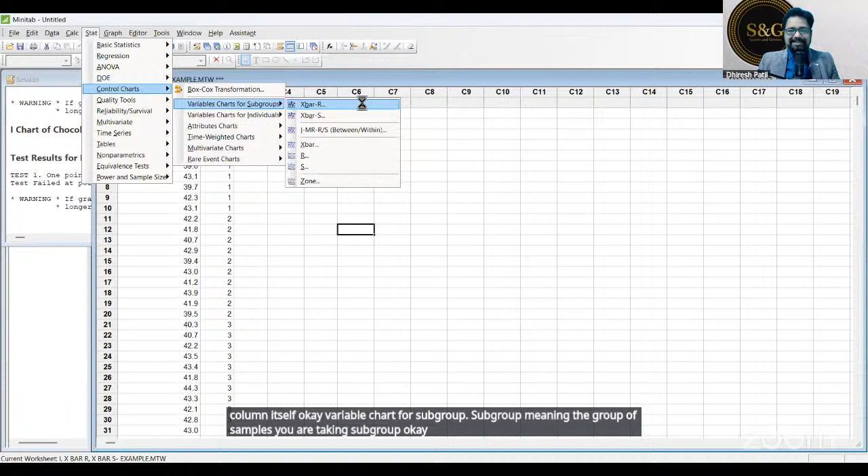Here you have to select chocolate weight, and for subgroup size you have to select sample. Chocolate weight ko yahan select karo aur sample ko subgroup size mein select karo and say okay.

If subgroup is less than 10, go for X bar R chart. Anything less than 10, go for X bar R chart. Anything equal to or greater than 10, go for X bar S chart. Clear? So you can decide like that.

What could be the reason for X double bar, X bar bar? What could be the reason? Type in the chat box. Why is it X double bar? Exactly, it is average of averages.

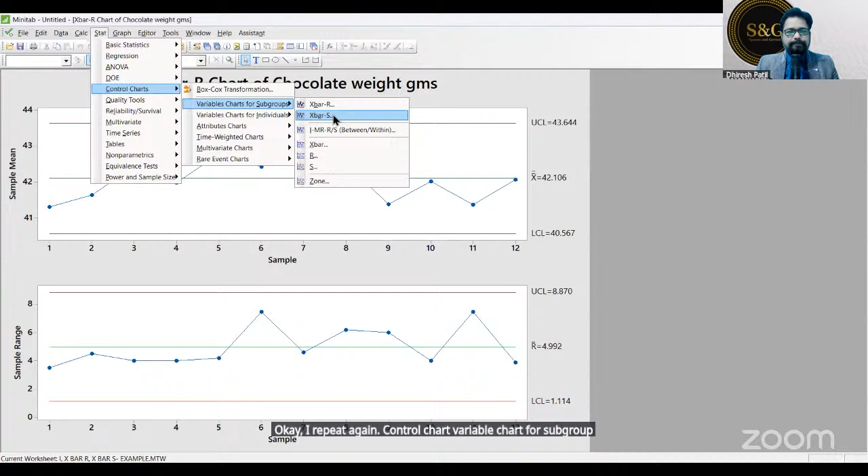Same thing, just have to select chocolate weight and subgroup size and say okay. And your X bar S chart is done. Let me just put both the charts beside each other.

But the R chart, which is converted into S chart, instead of range, now the software has calculated standard deviation. Whenever the data is more than 10, standard deviation is a stable metric to check the variation - that's why we go for X bar S chart. Clear? X bar R, X bar S clear hai? Just type yes in the chat box. You can do this.

Super clear, everybody? Amazing, superb, superb. Chalo, so let's go to the next one.

Let's go to the discrete control charts. I'm giving you a control chart. Just open this file. Okay, let's go for the P chart.

Any data point going beyond control limit, then the process is not stable. So you have to investigate what is wrong in the process and take the corrective preventive action on that process.

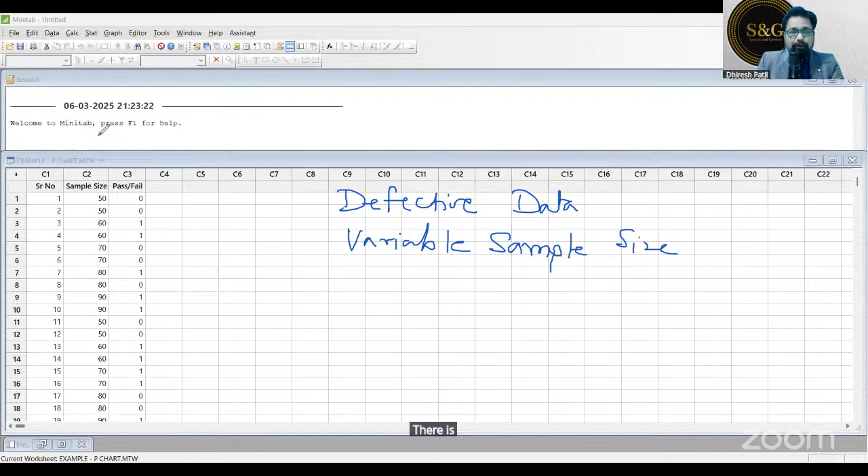Here in this case, there is the data of defective - students pass or fail. So out of 50 students, 0 failed. Out of 50 students again, 0 failed. So there are various batches of students.

So there is a batch of 60 students, 1 student failed. Again 60 students, 1 student failed. Out of 70, 0 failed. Out of 80, 1 failed, and so on. So variable sample size is there, and we have the failed student data.

Okay, so that's where we will use the P chart. So how do we use P chart? We'll go to the same Stat, Control Chart, now we will go for attribute charts - attribute chart meaning the discrete chart. So in attribute charts we will use the P chart. Clear? So now everybody follow this.

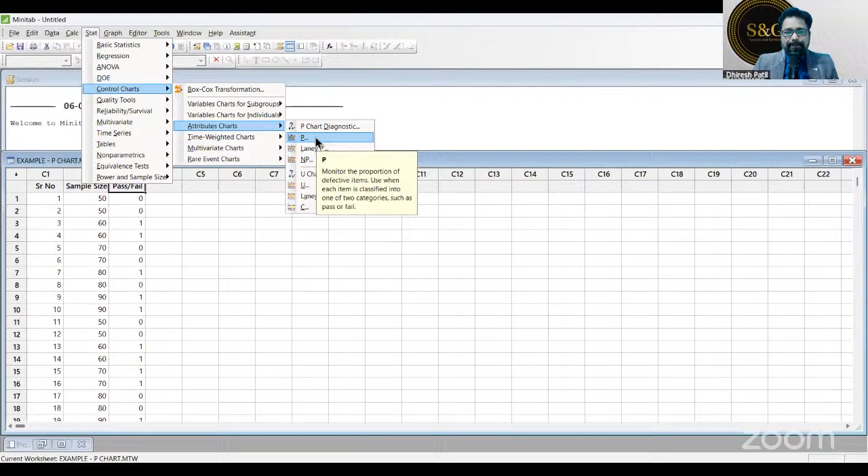Go to Stat, Control Charts, Attribute Chart, and P chart. Select P chart. In the variable, you have to select pass and fail because the defective data is put in the pass and fail column. And in subgroup size, you have to select sample size, because the sample size is varying. So accordingly the P chart has to be calculated. Okay, and say okay.

The software calculates the control limit separately for every data point. Because, for example, understand this - 1 failed out of 50 and 1 failed out of 80, the proportion is different, yes or no? Because the proportion is different, that's why for every data point the control limits are calculated separately.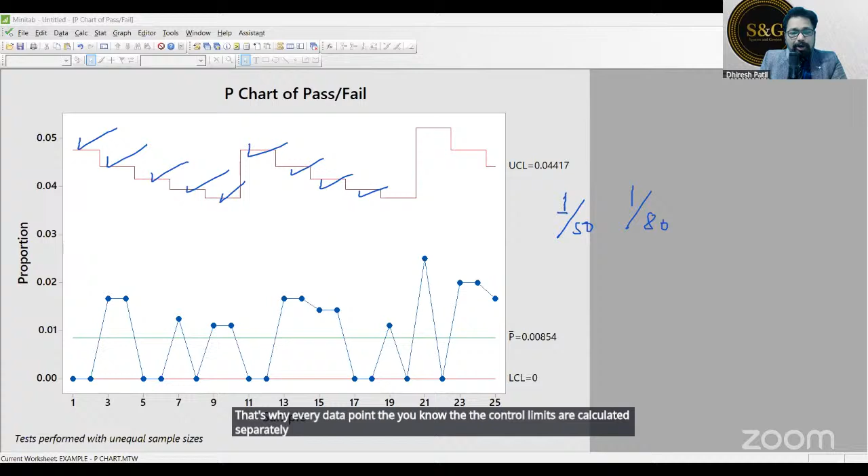Why is the lower control limit at 0? Because we will never have the proportion going below 0. At the most we can have a decimal like 0.00023, but you can never go negative, right? That's why the control limit, the lower control limit, is stopping at 0.

Clear? But the funda is very simple - any data point going beyond control limit is the special cause variation. That's it, clear everybody got it? So P chart is used when we have variable sample size and we are getting defective data. If you are capturing defective data, go for P chart. Just give me yes as a confirmation here.

Yeah, UCL is shown now. UCL is this. UCL is upper control limit, which is 0.04417. And LCL is 0. Lower control limit is 0.

Why is the upper control limit varying? Because various proportion data is there. That's why it is calculating the control limit separately for each and every data point. That's why it appears step by step, like this. Okay? Clear?

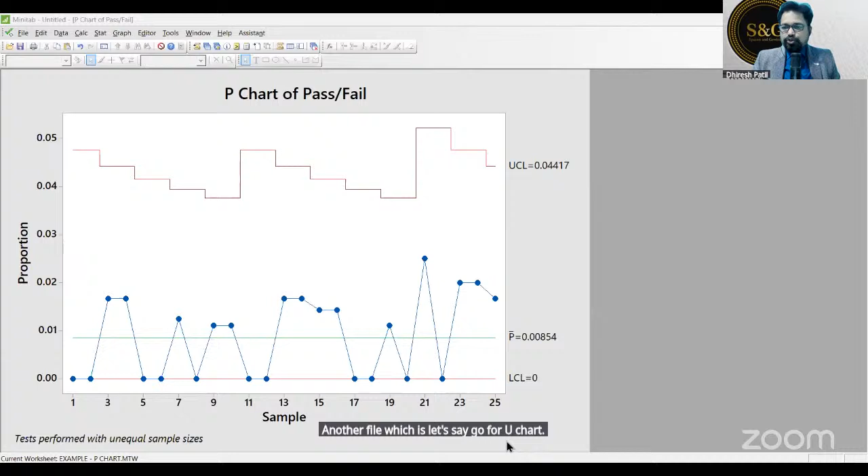Super. Let me share with you another file, which is, let's say, U chart. Okay, I'm giving you the U chart file. Open this file, U chart. Let me also open the file of U chart. Once you've opened it, let me know in the chat box.

Now, when do we use U chart? When you have the defect data and the variable lot size. So the lot size is variable, and instead of defective, you have the defect data. Opened. File opened. It's called U chart.

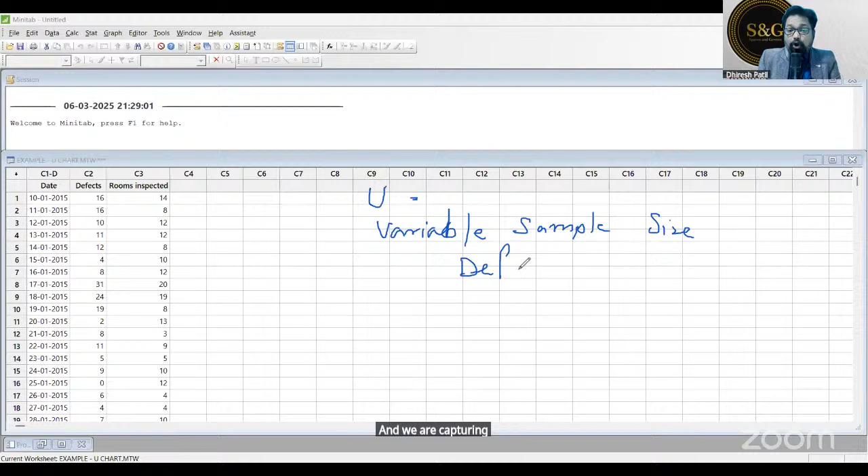Okay, let me also open the file, share the screen. So meanwhile, as you are opening the file, just try to understand the data. So this is a big hotel, and the quality manager of the hotel is inspecting the rooms every day. So when do we use the U chart? When we have variable sample size, and we are capturing defects and not the defective.

Now, here, on day one, the quality manager inspected 14 rooms, out of which he found 16 defects. A defect meaning the cleaning is not done properly, or the bed is not done properly, the washroom is not clean. So all these things are defects. Second day he has done 8 rooms and 16 defects. Third day, 12 rooms, 10 defects.

So the sample size is not constant. It's variable. Every day is not fixed. If every day he were inspecting, let's say, 10 rooms, then that would have been a fixed sample size. Clear? So we are using the U chart in this case. So let's go for the U chart right now.

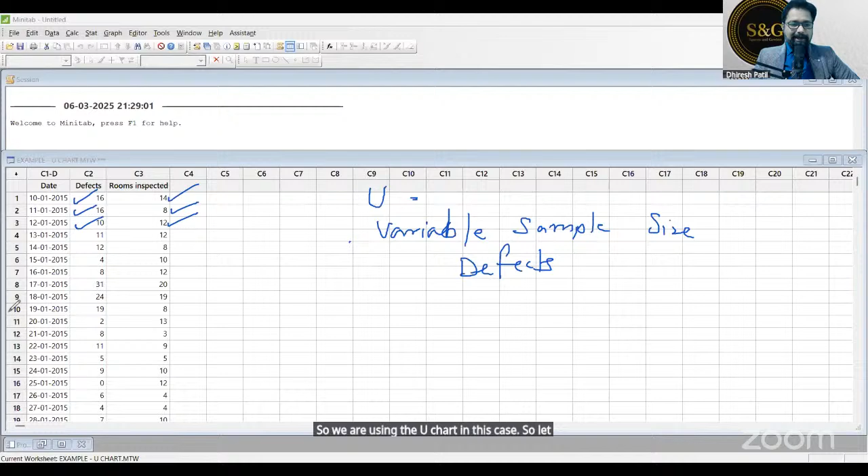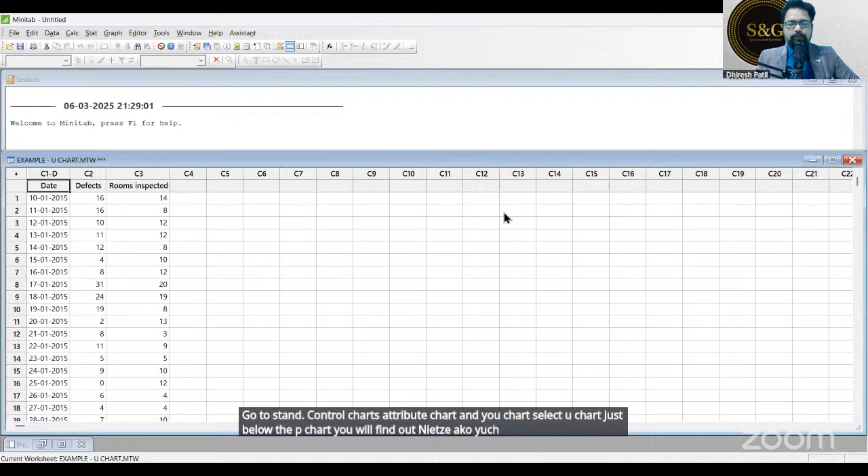Go to Stat, Control Charts, Attribute Charts, and U Chart. Select U chart. Just below the P chart, you will find it. The same thing. In the variable column, you have to select the defects because we are capturing the defects here. And for the subgroup size, you are capturing the rooms inspected. Rooms is the subgroup. And then say okay.

Wow. Look at this. So you have got these control limits which are set differently. Now you will find this process is not stable. You can see here 1 dot, 2 dots, and 3 dots which are going beyond control limits. Just a second. So whenever any data is going beyond the control limit, the process is not stable.

Okay. Did everybody get this U chart? Just give me yes in the chat box, everybody. Everybody got a U chart? Super.

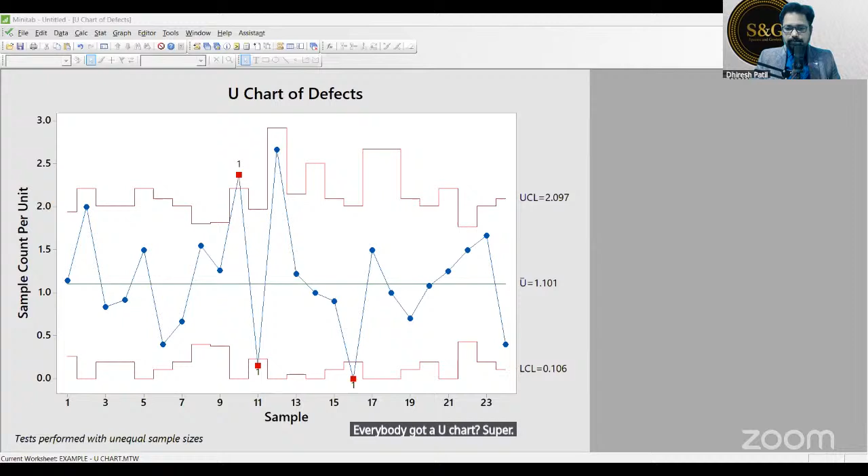Super. Let me just share another control chart with you, which is C chart. Now we will look at the C chart. Let's go to C chart. Open this file of C chart. I'm just giving it to you in the chat. Let me also open this file of C chart.

So when do we use C chart? When we have constant sample size and we are capturing the defect data. Constant sample size and the defect data. That's where we use C chart. So let me just share my screen. Once you have opened the file, let me know in the chat box.

Okay. So meanwhile, as you are opening the file, just try to understand this control chart. When do we use C chart? When we have constant sample size and we have defect data.

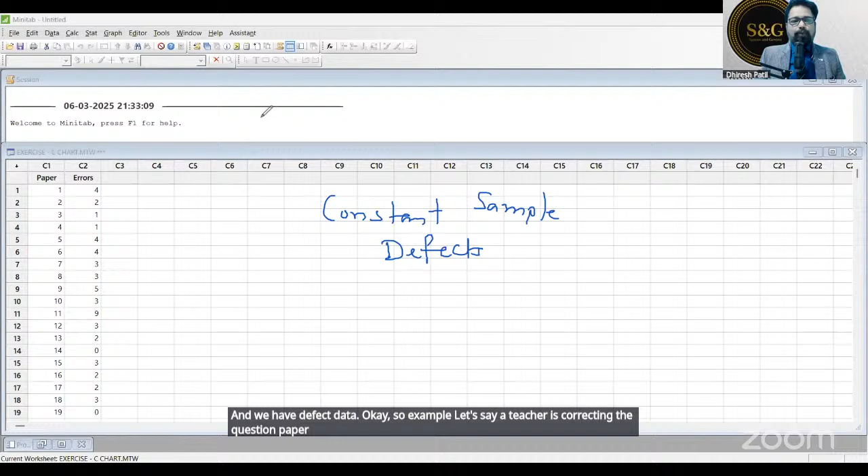So for example, let's say a teacher is correcting the question paper. Let's say the question paper has got 50 questions. So everybody will have the same constant sample size. 50 questions is a constant sample size. Out of 50 questions, how many wrong answers they have given? That is called error. That is called defect. It is not pass and fail. Pass and fail is defective data.

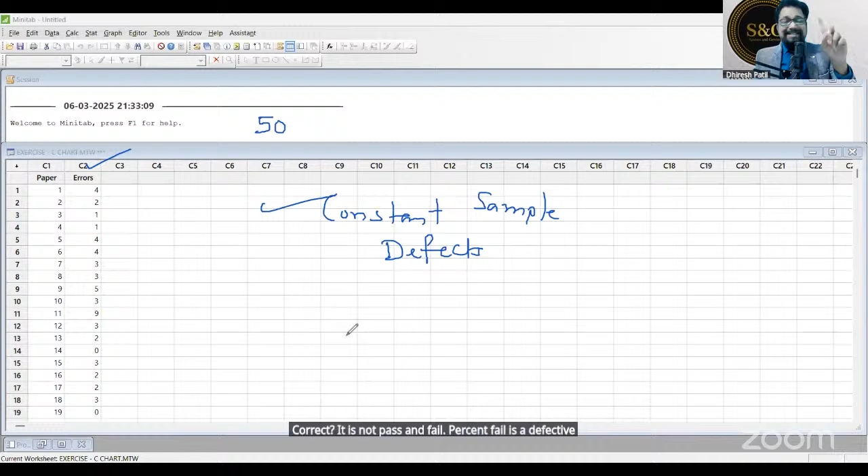Are you understanding this? How many wrong questions is defect data, and pass and fail is defective data. Did you understand this? Out of 50 questions, how many wrong answers? It is defect data. One question paper is a unit. Instead, if you collect how many students were there and how many students failed, that is called defective data. So that differentiation you should understand.

So let's find this out. Go to C chart. How do you go to C charts? Stat, Control Charts, Attribute Charts, and C Chart, which is at the bottom. Select that. Now select errors only. That's it. Select errors in variables and say okay. And you will find the C chart is completed.

Now, here again, the process is unstable because there are 3 data points which are going beyond control limits. So the process is not stable in this case. So the stability test failed.

Clear everybody? मिला सबको C chart? Just give me yes. Confirmation दे दीजिए. Super. Now let me share the last one.

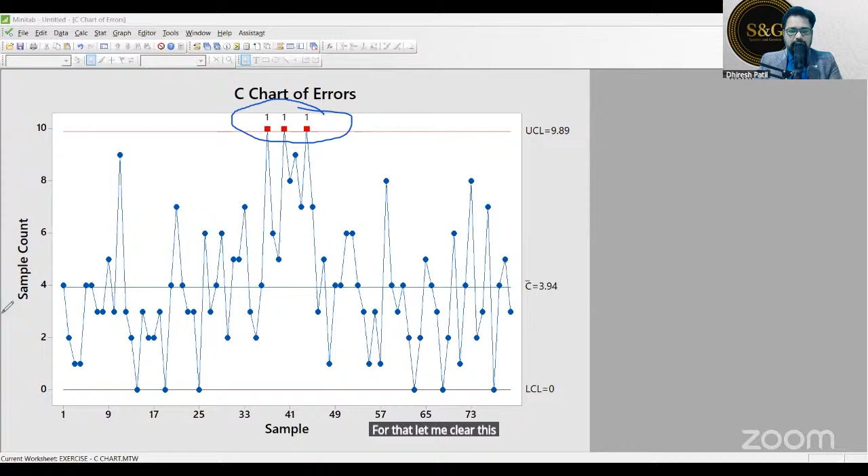It's called NP chart. NP chart भी कर लेते हैं. Before I explain you about the exam, etc. Okay. Chalo. So let me open up NP chart as well. Before that, let me clear this. And NP chart को use करते हैं. Okay, just download this last NP chart. Now, when do we use NP chart? When we have constant sample size and we have defective data. Defective data and constant sample size. Okay. So NP chart है. Open करो NP chart को.

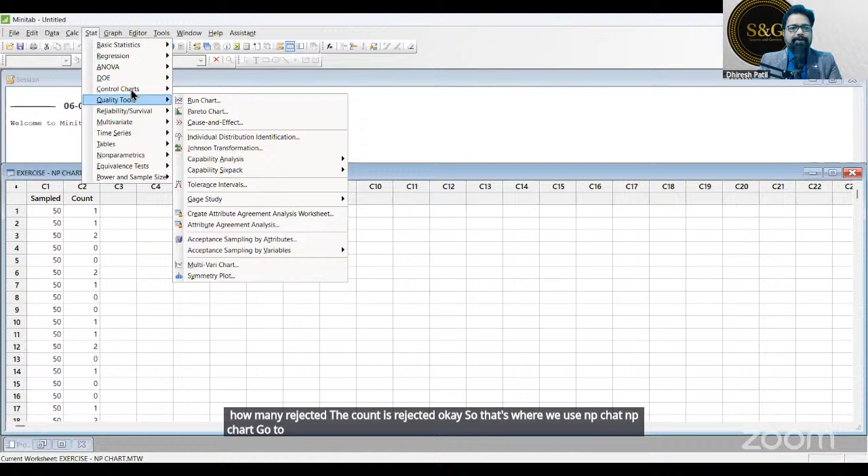So what is the data here? So how many samples you have? Okay. So there are 50 samples. You can see here the constant sample size, and out of 50, how many rejected? The count is rejected. Okay. So that's where we use NP chart. Go to stat, control chart, attribute chart, and NP chart. You can just select this.

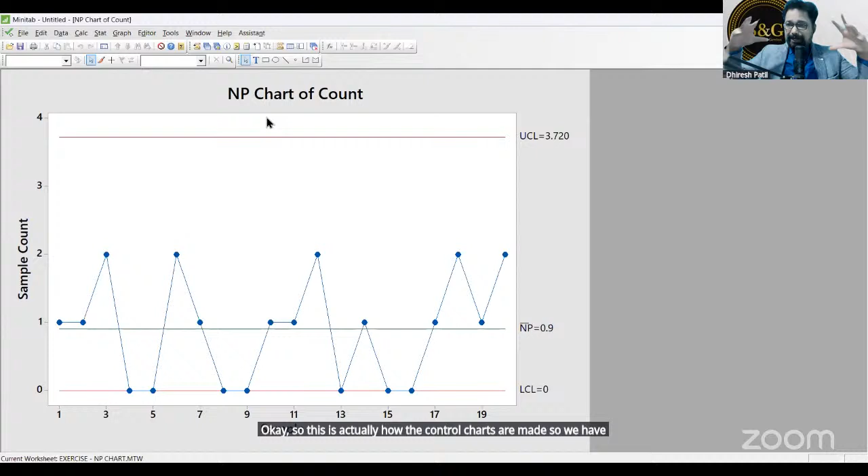Variable में count को select करना है. Subgroup में sampled को select करना है. Okay. Count को variable में and subgroup को sampled में. And say okay. And you will find this graph, which is fairly stable graph. There is no data point going beyond the control limit. Okay, so this is actually how the control charts are made. So we have seen 7 different types of control charts. So according to the requirement, you can select that control chart.

Okay, clear everybody? Just type yes in the chat box. Super clear hai? Okay. So that's it about the green belt curriculum, a fast track revision.

Okay. Now let's talk about how do we give the examination. First, who should give the examination? The people who have gone through this entire curriculum of green belt and have gone through the hackathon, they should go for the examination. Now tell me, how many of you have gone through the green belt curriculum? And how many of you have gone through the hackathon and are ready for the examination? Just type in the chat box. Rest of the people, take your time, go through this content first. You can give exam later as well. You can give exam individually as well. No worries about exam.

Let me explain you how the exam is conducted. Exam will be conducted completely online. We will share you the examination form, the link, etc. It will be MCQ type, multiple choice questions. For the green belt level, there will be 50 MCQs and the duration will be 1 hour. And 70% is the minimum passing criteria, which is standard across all the CSSC course curriculums. Now there are two options. What you need to do is the people who are ready. Okay. Yeah.